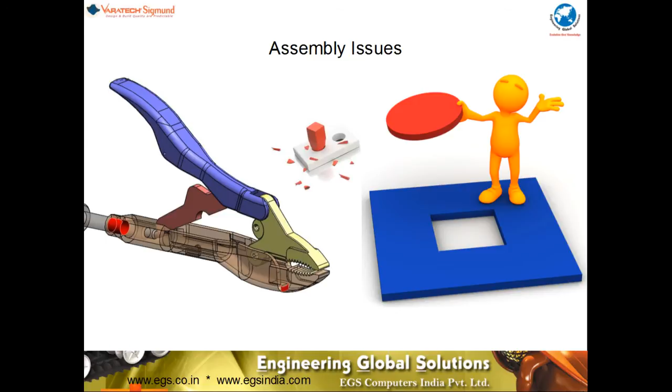Typical problems faced by the industries start with assembly issues. Components not fitting together, interfering with each other, forms a big part of the assembly issues that delay the overall production or influence the productivity of the organization.

Tighter tolerances are expensive to maintain is another challenge, where costs are going up exponentially as the tolerances are tightened for higher precision. In other words, the cost of precision being very high, the profitability of the company suffers as a result of that.

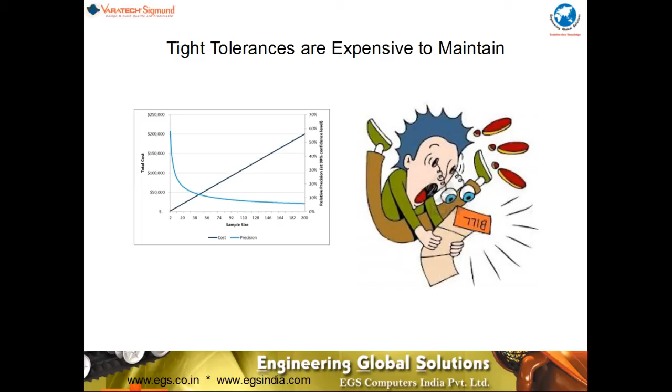Vibration issues as a result of the center of mass of a rotating assembly not lining up with the instantaneous axis of rotation, leading to performance degradation, vibrations, noise, premature failure. These are a part of the quality issues. Inconsistent vibrations across multiple assemblies is another issue.

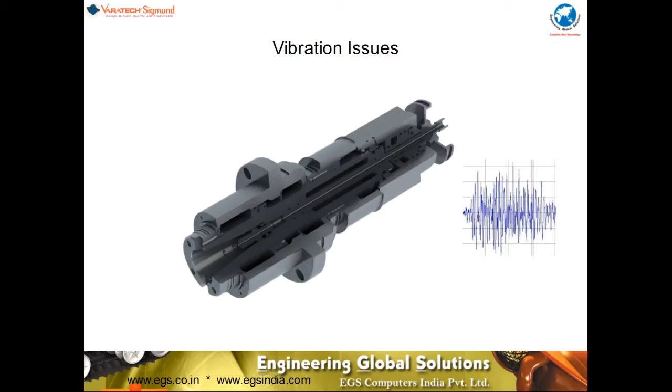Inconsistent product performance, let us say it is a valve or a pump or any other equipment which is failing to meet the requirements, maybe with regard to durability, maybe with regard to efficiency, maybe with regard to the overall performance, not because of a poor design, but because of the tolerance variations. Another issue confronted by the design and development team all the time: I do not know why this product failed while the rest of them passed.

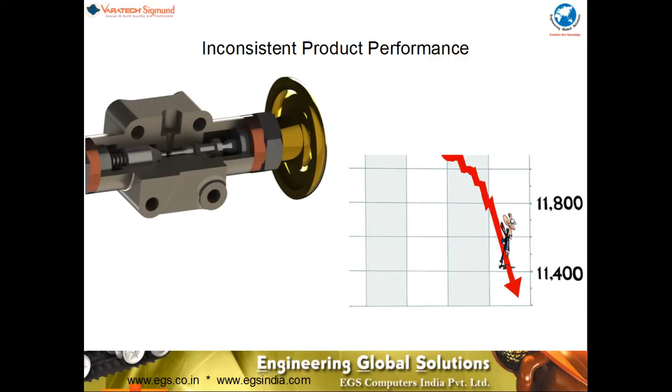Higher rejections coming as a result of tighter tolerances, or higher rejections because the process has gone out of control, or higher rejections because the components are not coming into assembly all the time. Return to the design department and they tighten the tolerances. How to eliminate these high rejections is always a constant source of worry for the organization, because the profitability of a company lies in its scrapyard.

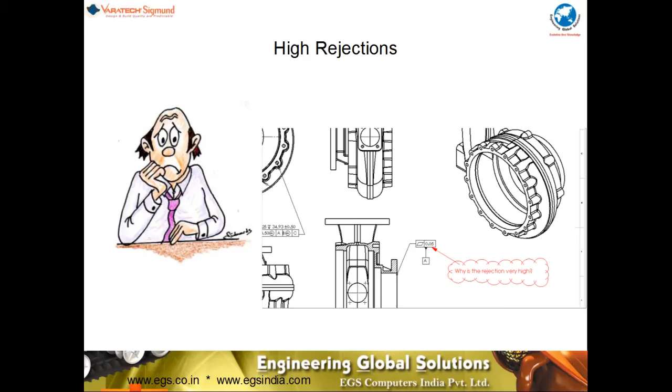Field failures and warranty issues affect not only the product performance, not only the product's life cycle, but also the company's image. It could be a result of the dimensional variations that are not captured as a part of the product design and development process.

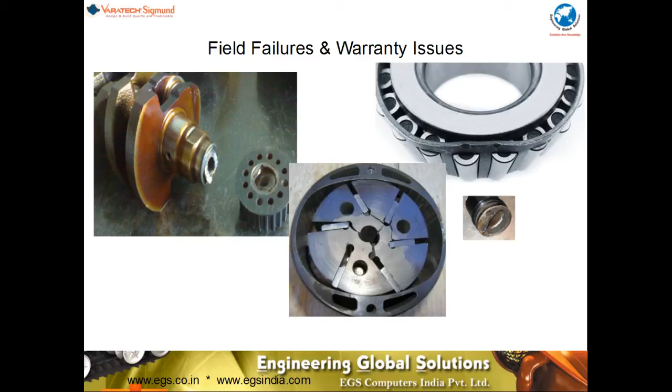A question to ponder is, the same drawings were used for the products performing without issues and failed products. Same suppliers manufactured the parts. Same assembly line was used. Same operators manufactured and assembled the products. Then why do some products fail in assembly or performance while others do not?

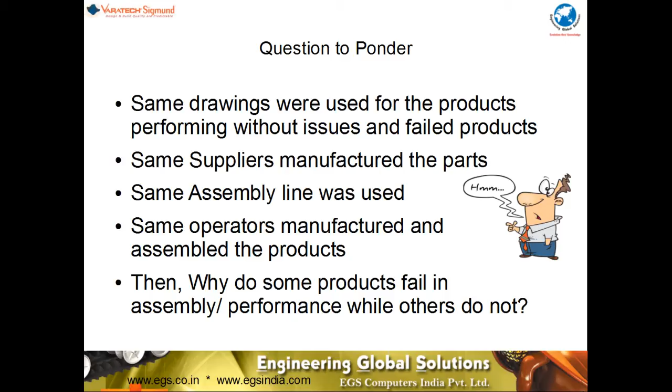The answer lies in understanding the concept of variations as provided by the tolerances on the drawings. These could be dimensional, as stated on the drawings. It could be a material variation, it could be an assembly variation, it could be operator bias, forces either during assembly or during function, temperature. These are some sources of variation that a person or a team needs to understand to try and bring them under control for a consistent quality in the products to meet the challenges that have been said ahead.

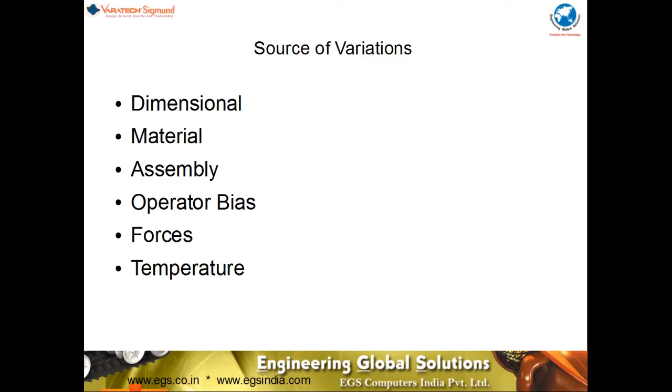Every design team is confronted with two types of issues. One is, how do my part tolerances affect my assembly tolerance or my assembly measurable specifications in terms of quality? Second is, I have an assembly requirement in terms of quality, measurable specifications. What should be the individual tolerances at the part level to achieve the same for the least cost?

The first one is called tolerance analysis. The second one is called tolerance synthesis. The Sigmund terminology for that is roll up for tolerance analysis and roll down for tolerance synthesis.

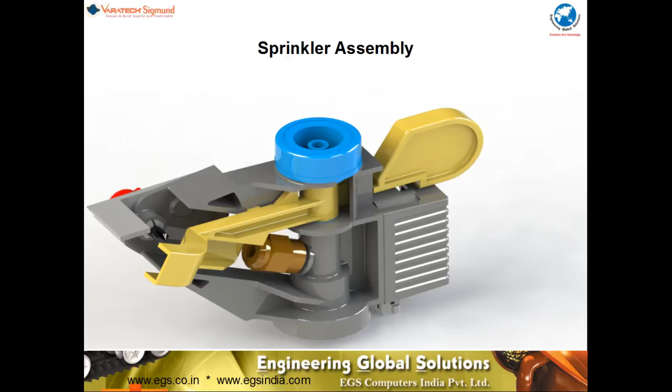Let's take an example of a sprinkler assembly as shown here. This would help us to understand the Sigmund process and differentiate it from the conventional methods in order for the companies to benefit.

The components that go into the sprinkler assembly start with the body, then the washer is inserted, the swing arm, which is yellow in color, is placed on top of it, while the jet gets assembled on the inclined shaft on the body. The cap gets put on top of the swing arm, and that's how the components are assembled.

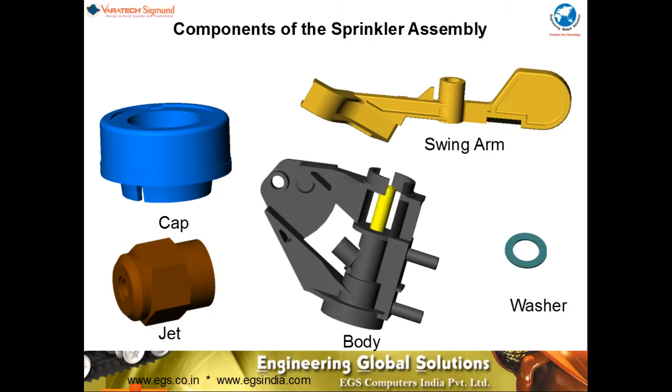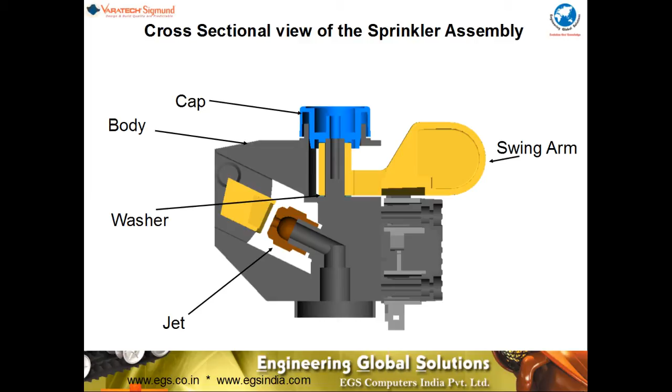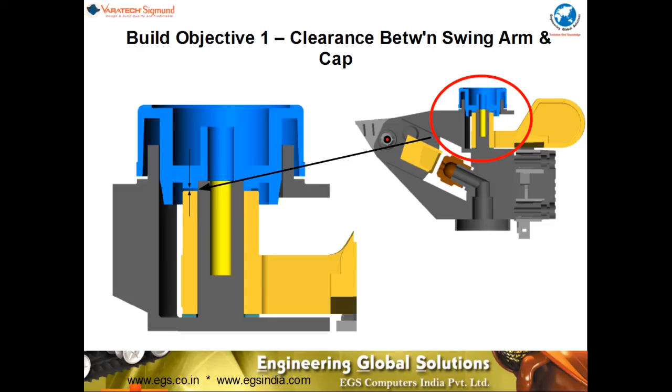The first objective would be the clearance between the swing arm and the cap, as shown in this picture. A closer look of the same would reveal the different dimensions that are taking part in this vector loop of clearance.

Inside Sigmund, the parts are created in the Sigmund Stacks approach, which is a non-CAD interface. CAD interfaces are available with ProEngineer, SolidWorks, and Solid Edge, while non-CAD interface does not require a CAD license. The drawings can be taken as the source of information to put it together inside the Sigmund interface.

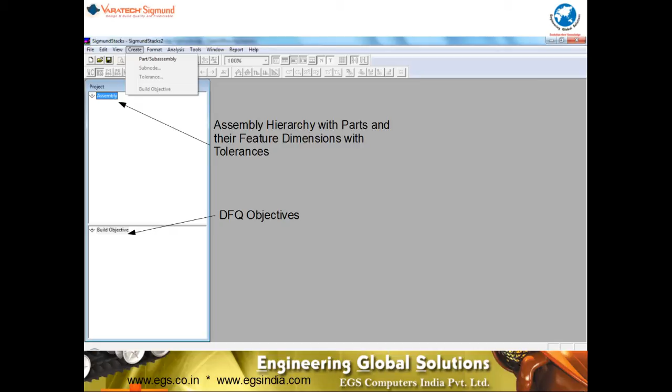The working environment of Sigmund provides a project window comprising of the assembly and the build objective windows. The assembly hierarchy with the parts and their feature dimensions with their tolerances find their place in the assembly window under the projects, while the design for quality objectives, which are measurable specifications, come under the build objectives.

The dimensions are populated according to the assembly hierarchy inside the assembly window as shown here. The dimensions and their tolerances could be either plus or minus, or could be any combination of the 14 characteristic symbols used in the geometric dimensioning and tolerancing approach based on the feature control frame.

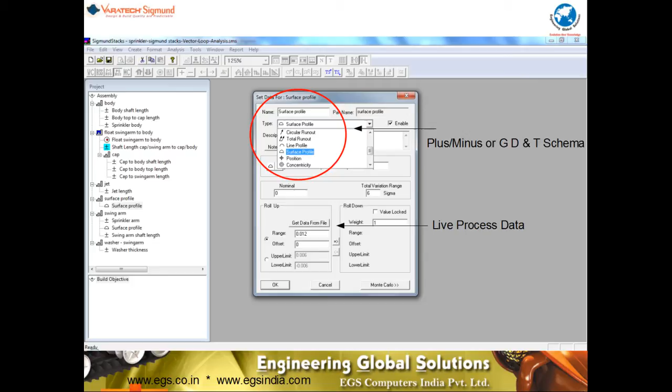These dimensions could be enabled, or the data could be obtained from a live process data, and then subsequently the build objectives are put together. Here, the gap or the clearance or the flush, as shown here as an example, is used as the build objective. This is where we define our DFQ objective.

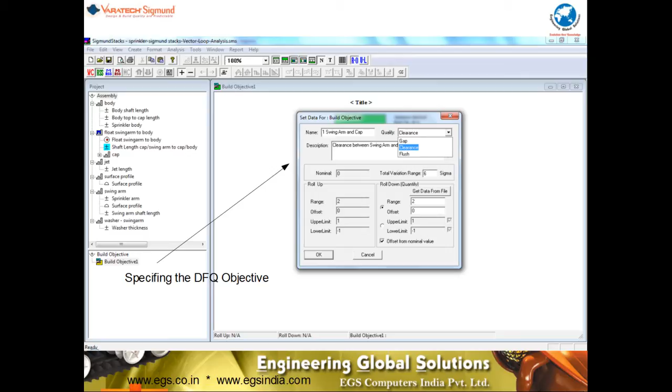Now, for forming the vector loop in the tolerance stack-up analysis, a node tree approach is provided by the Sigmund interface. This is a patented methodology provided by Varatech, unique in its own way because it is easy for us to do simple small sub-assemblies first before we start building up the main assembly. It's a building block approach.

Now here, all we have to do is drag and drop each and every one of the contributors that are coming in from the different part dimensions in the assembly as shown here. Component dimensions, which are coming from the same component, are grouped together as shown on the left side.

So subnodes comprise of sub-assemblies, main assembly could comprise of subnodes, and contributors directly coming from parts getting assembled at the top level. So the bottom-up approach can be used here because of the node tree approach.

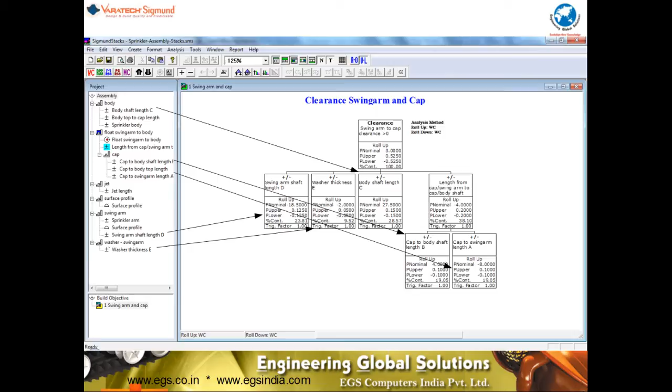Different kinds of analysis are provided for in the Sigmund interface. The worst case analysis, the square root of sum of squares or the RSS method, the modified RSS method which deals with shifted means of the processes from 1.4 to 1.7, and then the process centering RSS where the Cp/Cpk of the processes for the individual features to maintain their tolerances are given in terms of the Cpk values.

And subsequently you have the Monte Carlo simulation which goes through in a random methodology dictated by the Monte Carlo methodology.

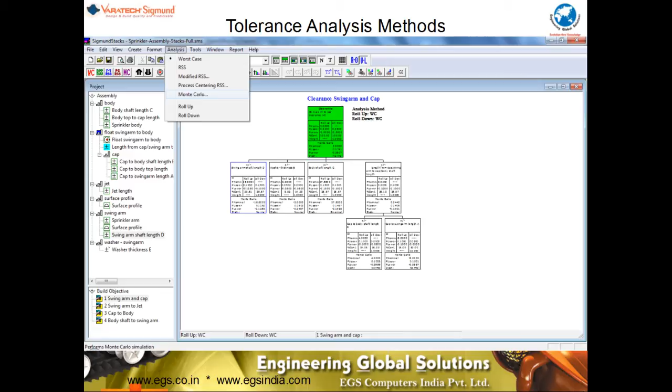Now you have the roll-up calculation coming in, wherein for the individual part dimensions and their tolerances, what is it going to be at the assembly level? The values are shown over there as 3 plus or minus 0.525. That would have been the clearance between the swing arm and the cap as a result of the tolerances that have been provided at the part level.

The roll-up and the roll-down calculations and the different methodologies or the tolerance stack-up analysis methods are provided in the toolbar, which can be easily picked up, and the person can do an analysis at the touch of a button.

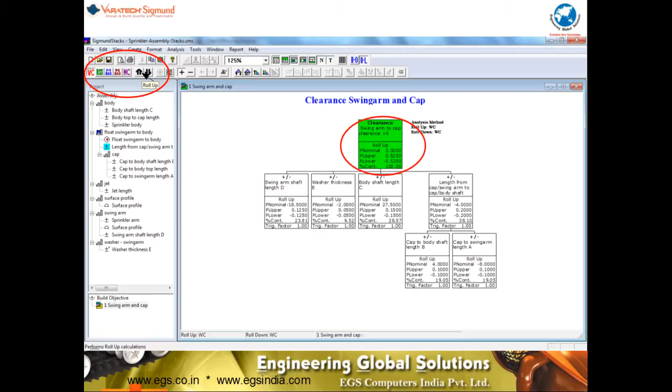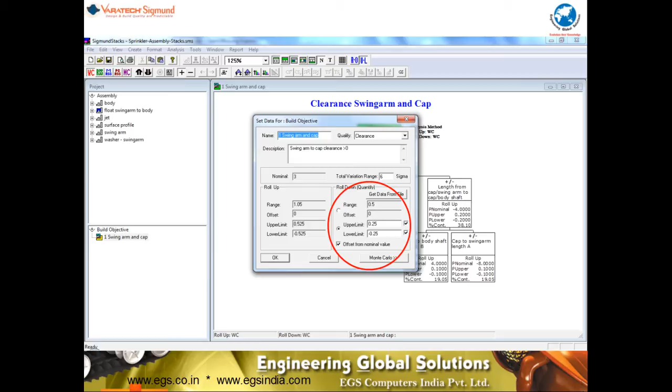Now, once we know what it is that we can get, now we can introduce what we really want. In this particular example, it could be 3 plus or minus 0.25. Then in that case, that becomes the limits that specify within which the desirable tolerances need to lie. As a result of doing this, you get the assembly yield in terms of ppm and the CP/CPK of the assembly to specify where we are with regard to what we need.

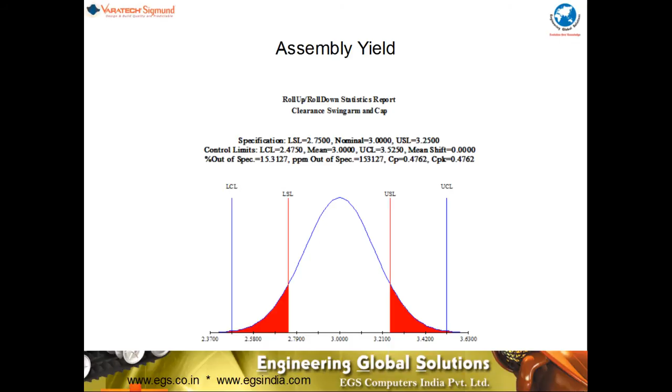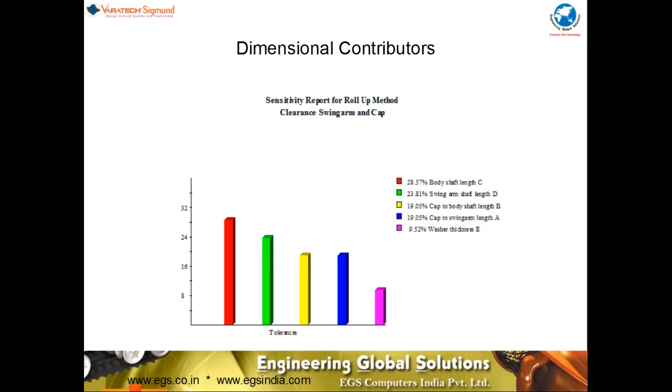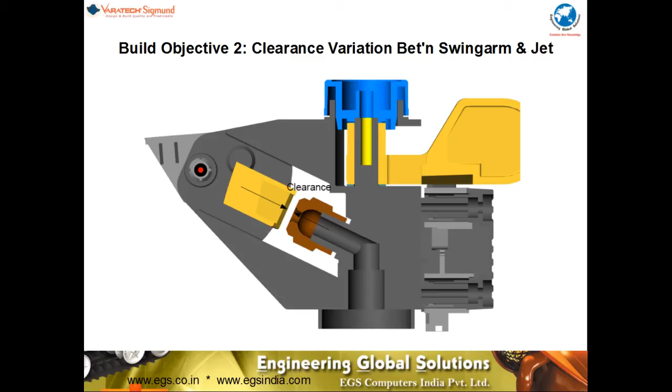Objective function number 2, clearance variation between the swing arm and the jet in a direction which is not in line with the assembly direction, leading to multi-dimensional tolerance stack-up as shown here. The different contributions are coming from the washer thickness, which is in the vertical direction, having its direction cosine component coming in,

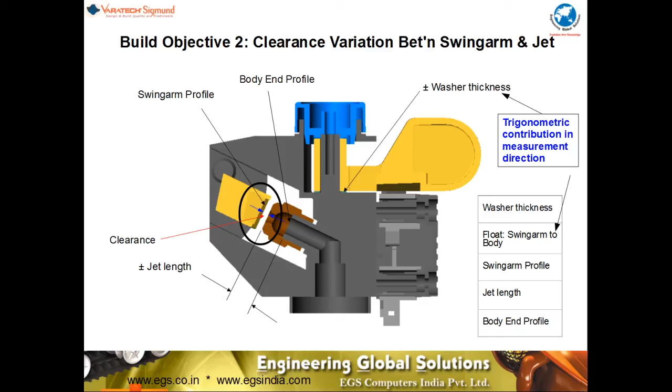the float and the swing arm to the body, again contributing trigonometric contributions, and then the swing arm profile, the jet length, and the body end profile. These are the contributors that go in together to form what is called the vector loop as shown in this picture. So multiple build objectives can be built. There are no limitations to the number of build objectives a particular product may take on. So the trigonometric factors are provided as shown over here.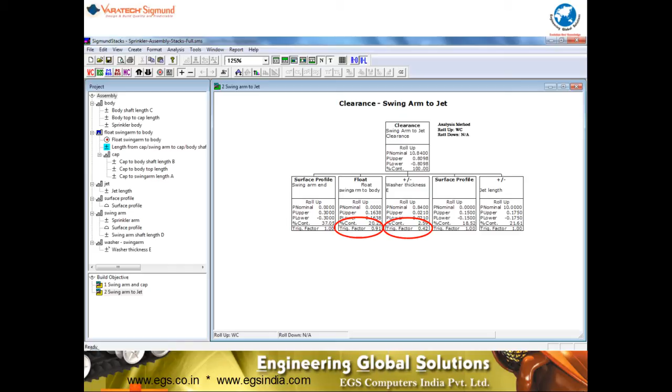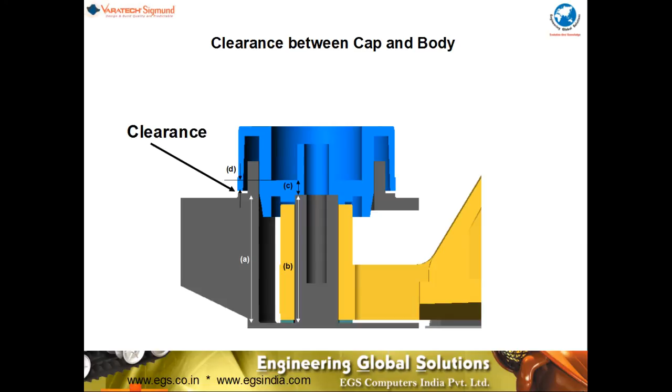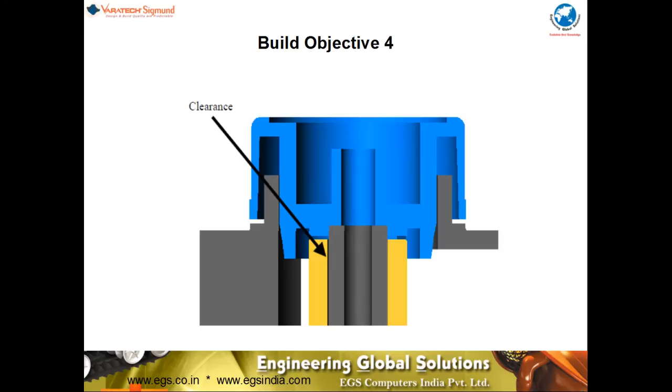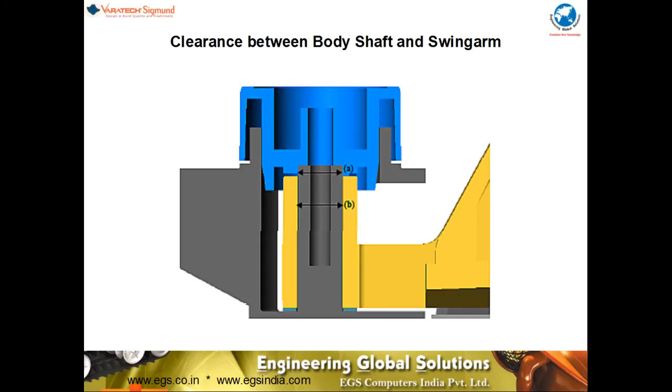The third build objective becomes the clearance between the cap and the body. The contributors for the same are shown in this picture. Each one of them is lined up inside the Sigmund interface, dragging and dropping again, and performing the worst case calculations as required. And the last one is nothing but the clearance in build objective 4 between the body shaft and the swing arm. Since this is directly related to the size dimensions between the two components, diameters, it is specified right there and the worst case analysis is performed.

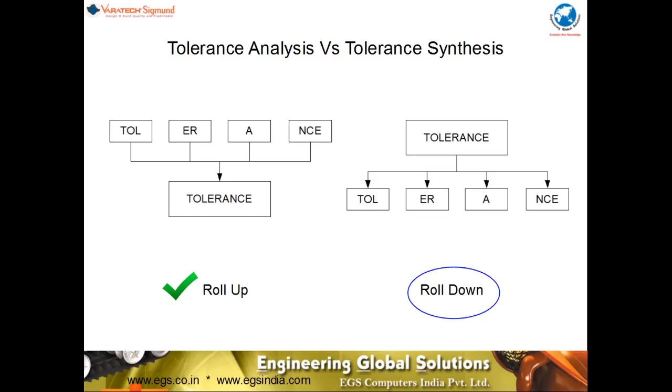Till now we have done the roll-up calculation. Now we need to know the roll-down calculation as compared to the roll-up, wherein we specify the desired values for the tolerances in the assembly and what should be the individual part tolerance for achieving the same. It comes in a very simple step. As you can see, it's a touch of a button and you get on the right side of every one of those squares the roll-down values.

The top node has the desired levels. The bottom ones have the contributory levels that would have led to the desired sequences. And then you have the washer thickness which is locked because it's a bought out item which is not under our control in terms of the specification for the tolerances of the thickness of the part. And then you have the body shaft length specified here as the tolerance gets tightened from 150 microns plus or minus to 100 microns plus or minus. We need to remember this because there's something else coming up interestingly down the line.

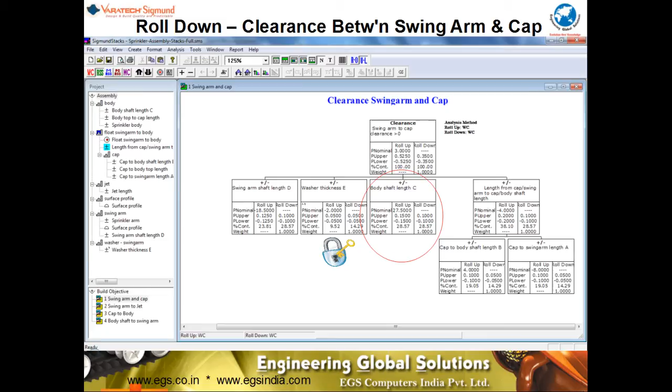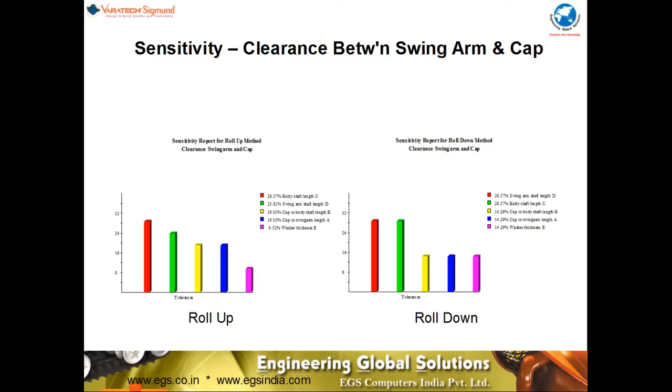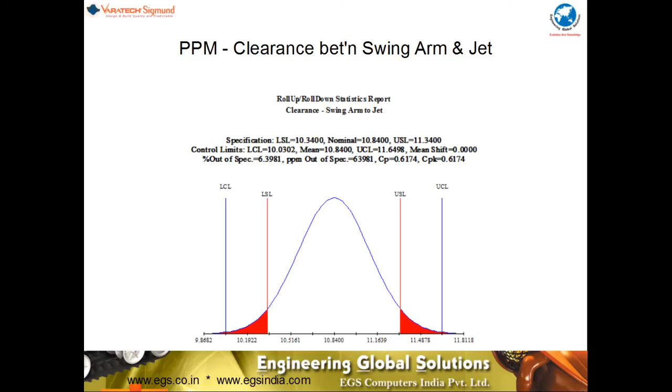The PPM for the clearance between the swing arm and the cap is provided here. The contributors before and after and the level to which their contributions have changed are provided here in the roll up as well as in the roll down for this particular study. Then you have build objective 2, the clearance between the swing arm and the jet, the PPM levels for the same, the contributors for the same. This exercise is repeated for each and every one of the build objectives. Now here you go, clearance between the cap and the body.

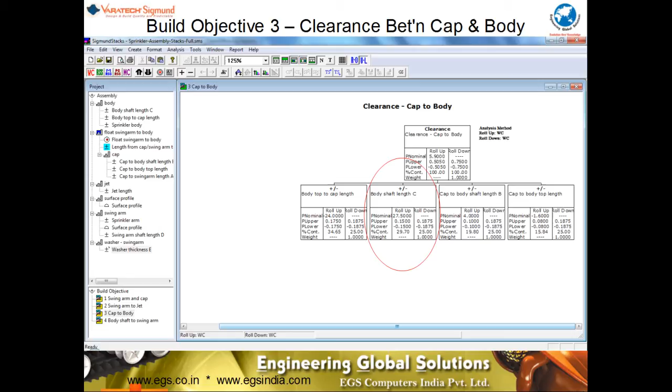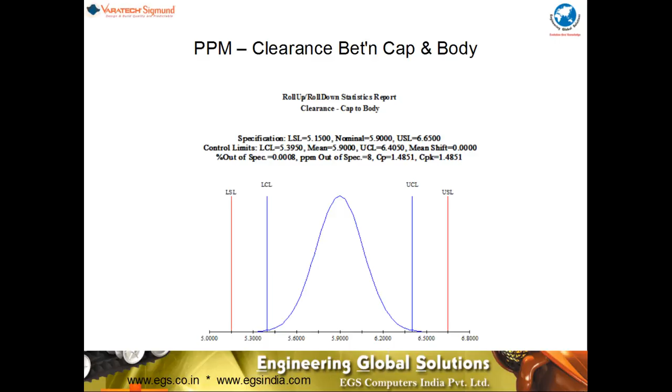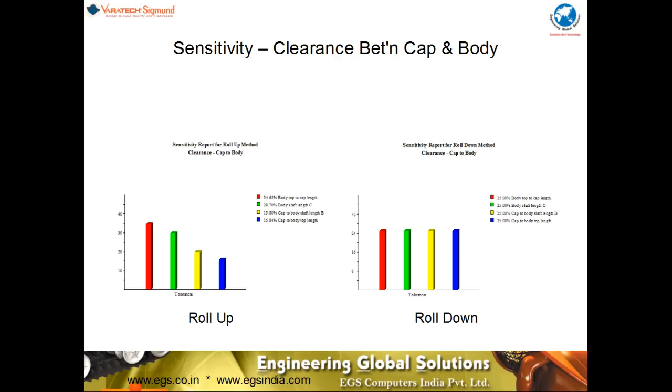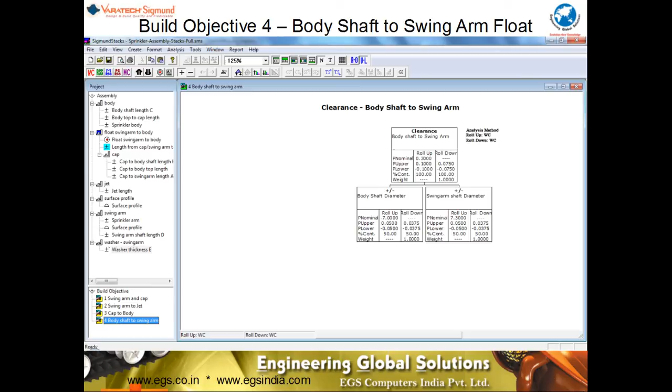Here we have the PPM again shown as the clearance between the cap and the body, which shows the specs, number of components out of spec is insignificant so that we can loosen the tolerance. Sensitivity again comes in before and after the roll up and the roll down. And then we have the fourth build objective, again the roll down calculations over there, the PPM for the same, the sensitivity for the same and the changeover after the roll down. And then you have the Monte Carlo simulation here showing for 10,000 pieces how the histogram would look.

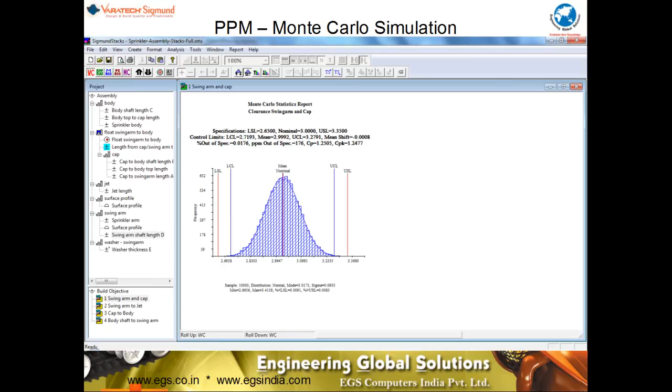Essentially what we have done is we have tried to arrive at the tolerances for the individual build objectives. However, there are certain contributors which are common between different build objectives. In one case it could be a minimization of a value, in another one it could be a maximization of a value. That's where the tolerance optimization across build objectives comes of use.

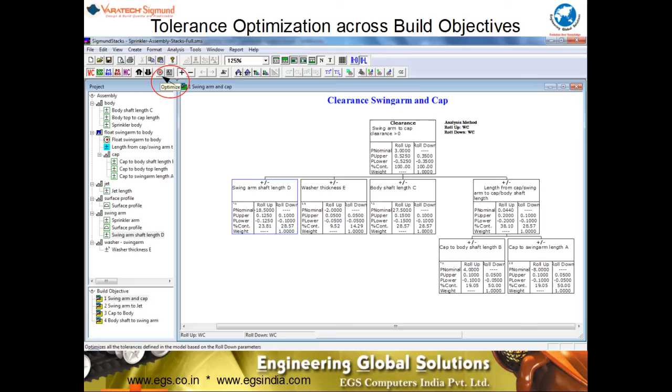Sigmund has a very powerful optimizer which goes across multiple vector loops without any limitation based on the weighing factors which is given at the bottom of each one of those dimensions. The weighing factors is nothing but the cost of precision. You take that, you go through the optimization and you get the global optimization report. This tells you what has changed, what has not changed, in which part it has changed, in which dimension it has changed, and what was the method of analysis that was adopted to arrive at those values.

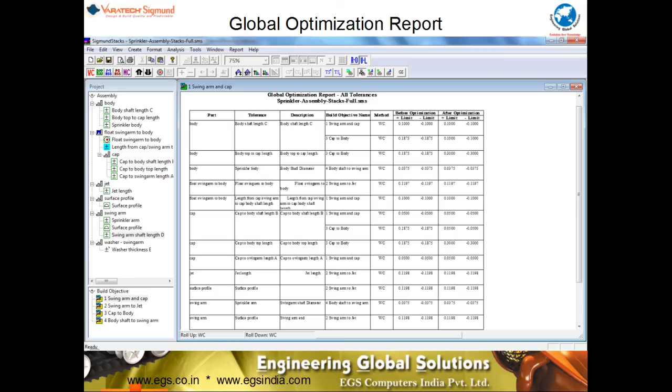Many reports can be generated using Sigmund: the statistical reports, the sensitivity report, the optimization report, and you could get the min-max from the optimization report, or you could get only the tolerances which were increased or the tolerances which were decreased separately in each report so that you know exactly where the changes have been made. And then you get the global summary report, the cost savings report, the statistical process control report that needs to go to the manufacturing and the inspection for them to adhere to, and then the tolerance analysis reports. Versatility of Sigmund lies in its report generation, as you can see here.

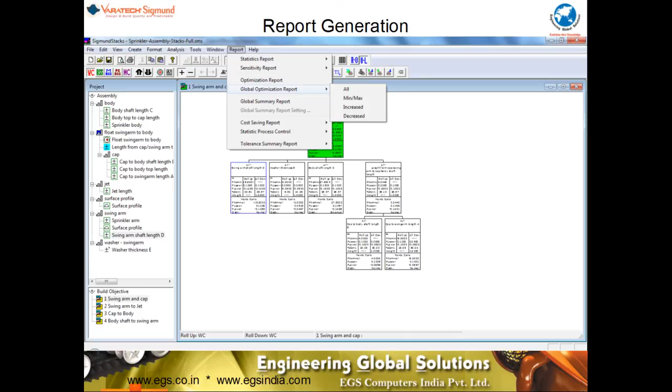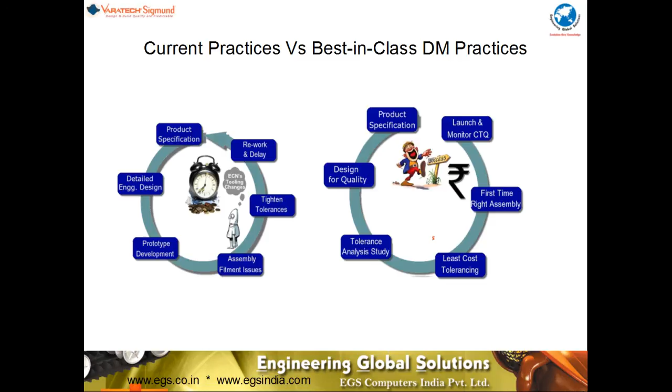In the right-hand side approach, which is nothing but the Sigmund approach, you have what is called as the product specification, going back to the design for quality objectives, then the tolerance analysis study, the least cost tolerancing, the first time right assembly, launching and monitoring the CTQ. The cycle never repeats itself. So the best-in-class dimensional management practices are incorporated in the Sigmund process, as you can see here.

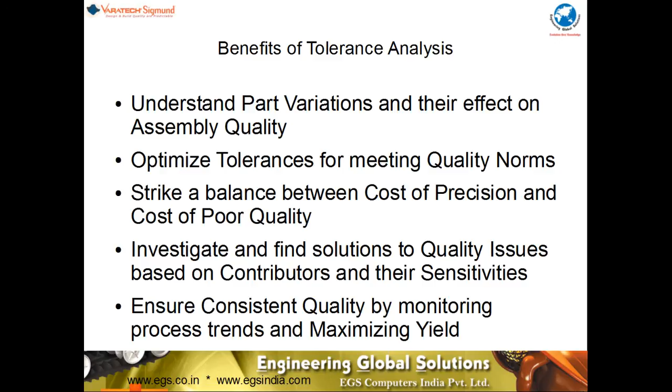What are really the benefits of the tolerance analysis method as proposed by Sigmund? Understand part variations and their effect on the assembly quality upfront. Optimize the tolerances for meeting the quality norms. Strike a balance between the cost of precision and the cost of poor quality. Investigate and find solutions to quality issues based on contributors and their sensitivities. The CTQs in these cases are objectively selected and not subjective. This ensures consistent quality by monitoring the process trends and maximizing the yield.

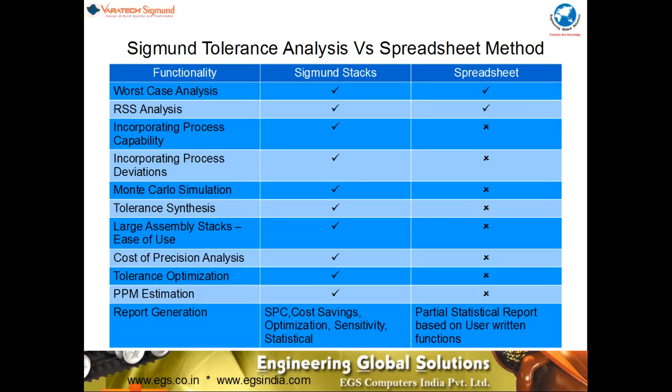What have we learned from this presentation? How to perform a tolerance stack-up analysis without a CAD license, how to specify tolerances at the part level to meet the assembly build quality objectives, which tolerances are critical to quality, how to maximize the tolerances for least cost, how to ensure consistent quality.